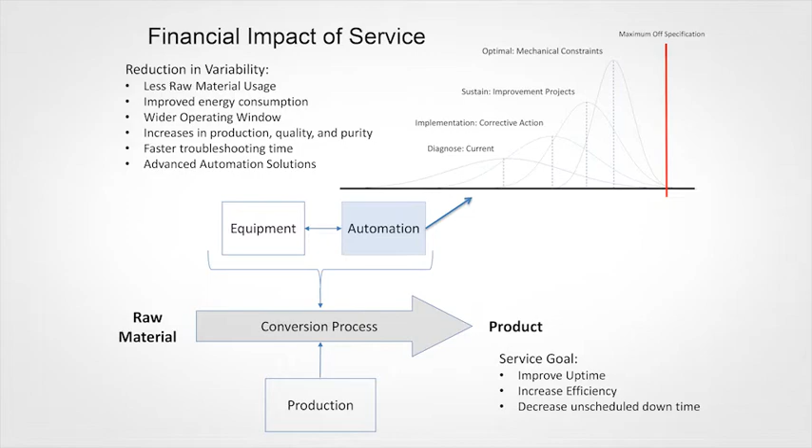That's what we're seeing in this picture. Now we have more data than we've ever had in the past. Without an automation system, when you're controlling it by manual methods, waiting for a reaction before you make a control, you typically have a wide variability in the spread of your quality data or your production data. By adding automation equipment, we're able to reduce the spread of that variability and allow you to have a wider range of control of your industrial process. A wider range of control allows you to run faster, run longer, run smoother, have less wear and tear on the equipment. That's why automation solutions are even put in place to begin with.

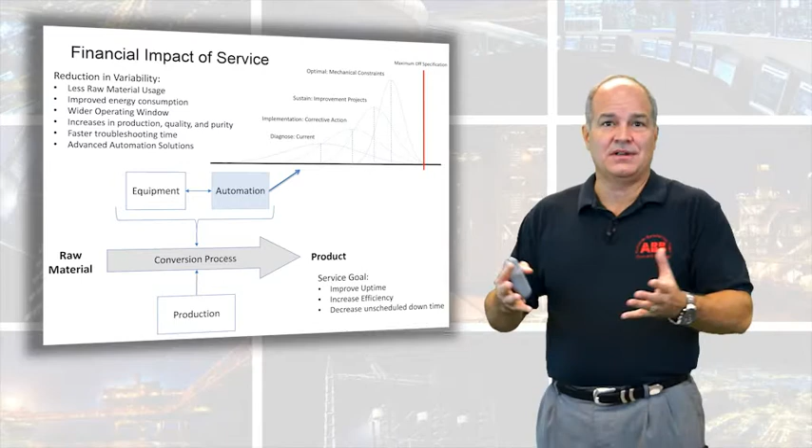Instrumentation, smart instruments, protocols that can tell you everything about them. There's more data coming from an instrument than we've ever had before, and at more accurate and less tolerance and error to the measurement. Then there's the utilization of the control system. We, as a manufacturer of automation equipment, didn't design it to be turned off. If the control is not running, it's broken.

Data storage. 20 years ago, there was no such thing as data storage. It just sort of flowed through. We would get called in, and I'll show you a picture in just a minute of what we mean. But today, we have gigabytes, terabytes of information at our fingertips.

The platform, there used to not be a control system platform, now there is. Software applications that can pull together multiple layers of control strategies, from multi-input multi-output to feedback, feed forward, ratio, min-max. There are so many different applications we can do through software that weren't even possible just a few years ago.

User displays, are they set up for your operators to get the information they need? It's no longer okay just to look out over the plant. They need to be able to look into the plant.

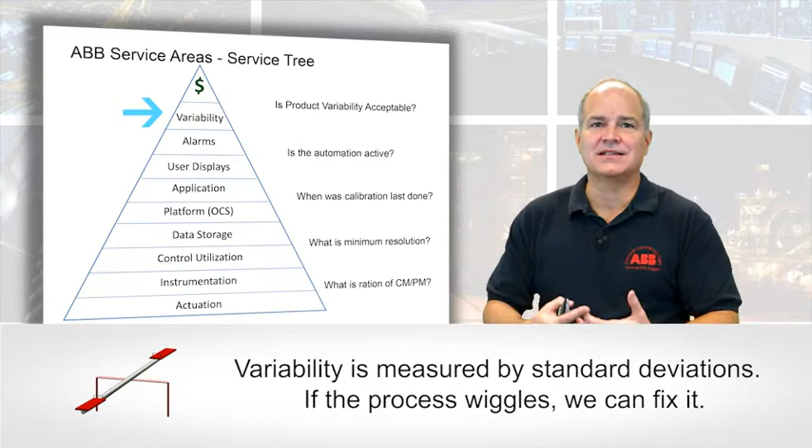Variability, this is the area I tend to migrate towards, is production variability. What's going on in your process? Causality issues, input, output, bottlenecks. How do we fix that?

And the reason we do all this stuff is to get to the top of the pyramid here, which is money. The better your automation system is functioning, the more production, the more quality, the less cost to produce, which is more money in your pocket. That's why we have an automation system.

But with that system requires service. This is an actual picture that I took 20 years ago in an industrial plant. You can see here, this was the definition of an operator display. These are quarter din controllers that would line a whole room.

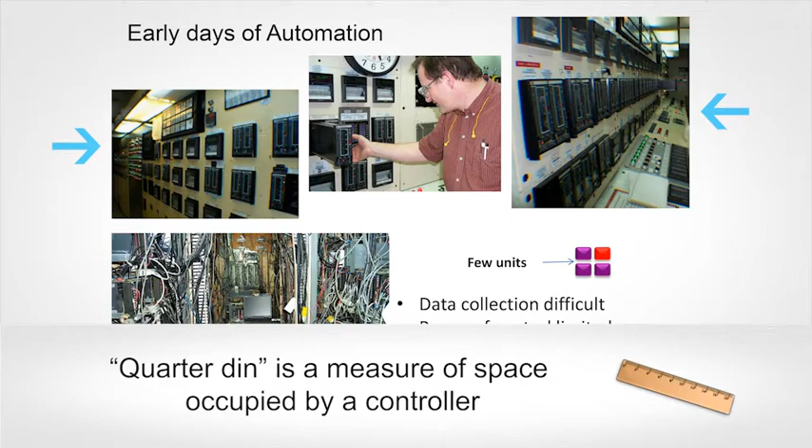You can see them, and to do any work on them, you'd have to actually go in, pull it out, and look at the paper. This was, and still is in a lot of places, what we're talking about as an automation system.

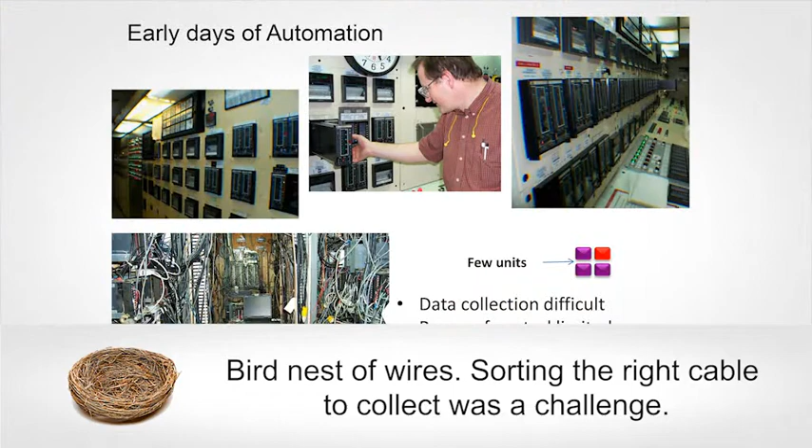Maintenance on this was very, very different. If you went on the back side of this wall, you saw this panel here. This was actually my notebook. I was sitting on a cable, you can see it, reel. There was my computer, my case, and this was the back of these panels.

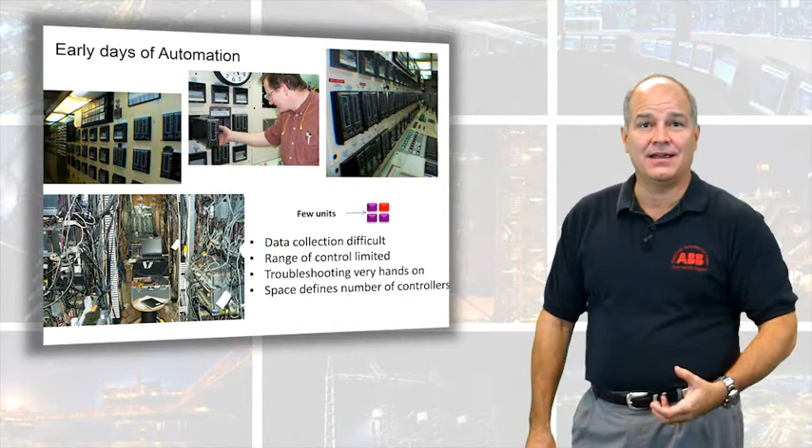At that time, we were only able to look at 3 or 4 controllers at a time. Customers paid a lot of money for us to come in. It was very risky, very dangerous, and you can see it was a spaghetti mess to get data.

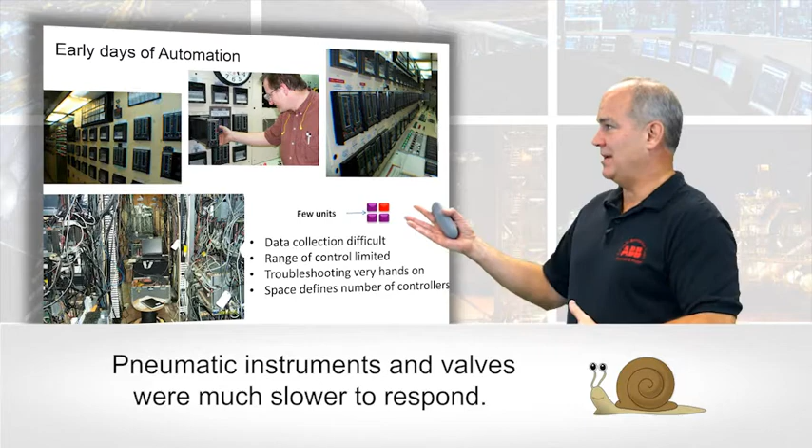The good thing is that when these systems broke, it really wasn't catastrophic. One of these could go down, and that's not true anymore. There weren't so many. So if it took us an hour to find a broken asset, within 4 hours I would find it. That wasn't too bad.

What about today? Fast forward to today's systems. This is what you're looking at. Over here you can see there were physical space constraints based on the size of your wall. Today it's not that way. You have operator displays that give you more visibility than we could have ever dreamed.

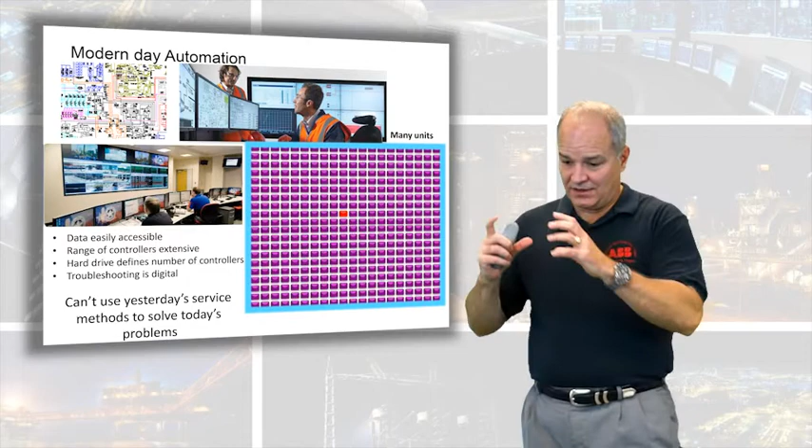You have process charts that have more information than you can even grasp. This represents 400 control or automation systems, which isn't uncommon. I've seen some sites that are up to 2,000, 2,500.

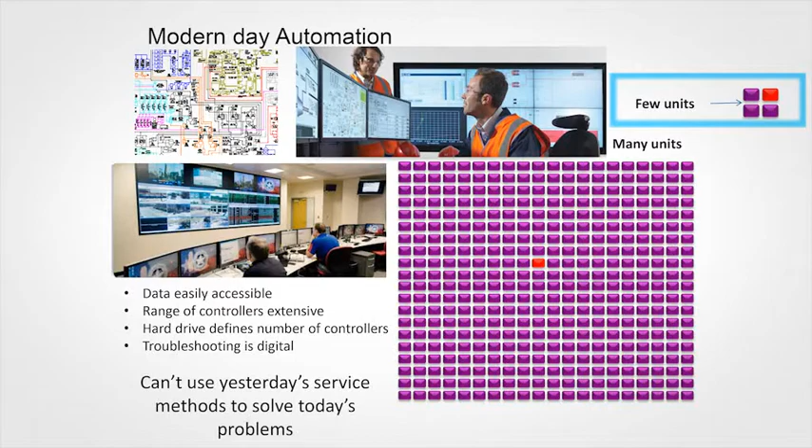Now take a look, if you notice, right in the middle, I've changed the color of it. So that one has the same problem as this one. Using yesterday's techniques, it took me 4 hours to find that problem. How many hours is it going to take to find it here? Literally, it will take so much time that you'll never find it.

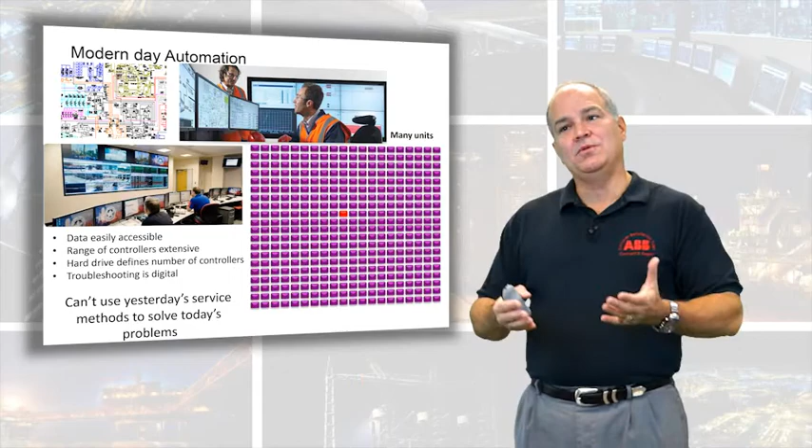So what has happened is we've moved into the area where operators, these guys running the plant, have to tell the E&I staff when it's broken. So what made the operators experts in automation? What's happening is a decline in the ability of our automation system to do what it was designed to do, because we're using yesterday's techniques on today's systems.

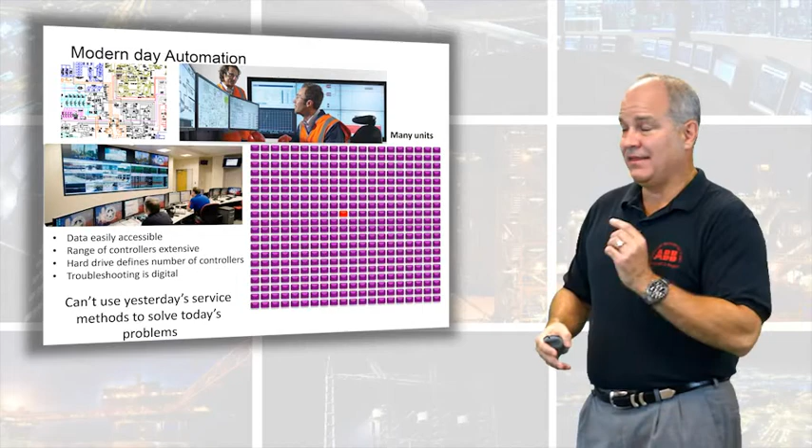That's what automation service enables you to do, is to expand your scope of what you're looking at. You can't add enough people to do the methods we used to have. So it's kind of like that whack-a-mole game, you're solving the problem, whichever one comes up.

It's a very reactive service. Reactive services are dangerous, cost inefficient and ineffective. You have to wait for a failure before you start. That's not the service of automation, and that's not how we designed it to run.

This picture captures the essence of what we're doing with these gigantic automation systems that are put in place for a reason: to make more money for our customers and our clients, and to improve efficiency of taking a raw material and making it a usable material.

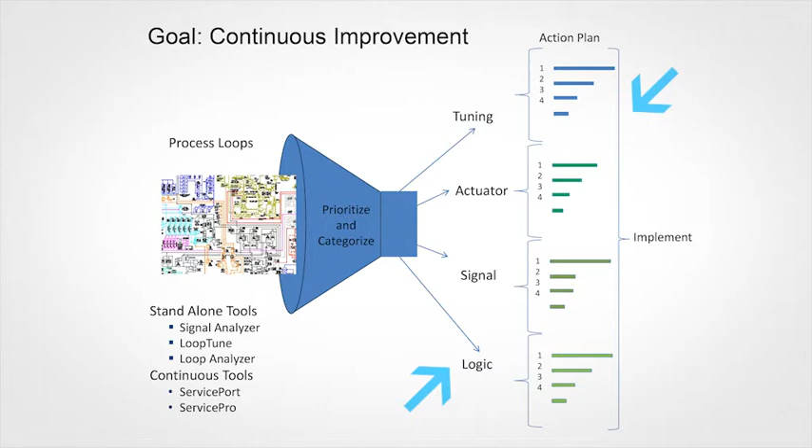But you have these gigantic systems. Wouldn't it be nice if we had a mechanism to sort it in terms of a prioritized list that tells us if I have a control problem, a tuning problem, a cybersecurity problem, or an alarm problem? Or what's the mix of preventive maintenance, corrective maintenance, or predictive maintenance?

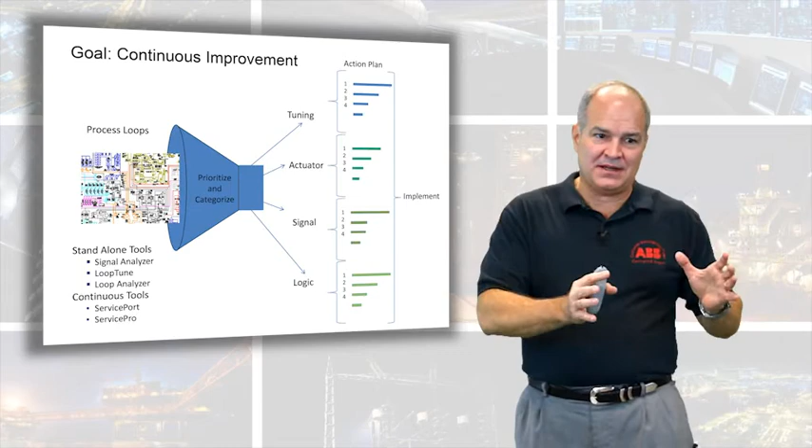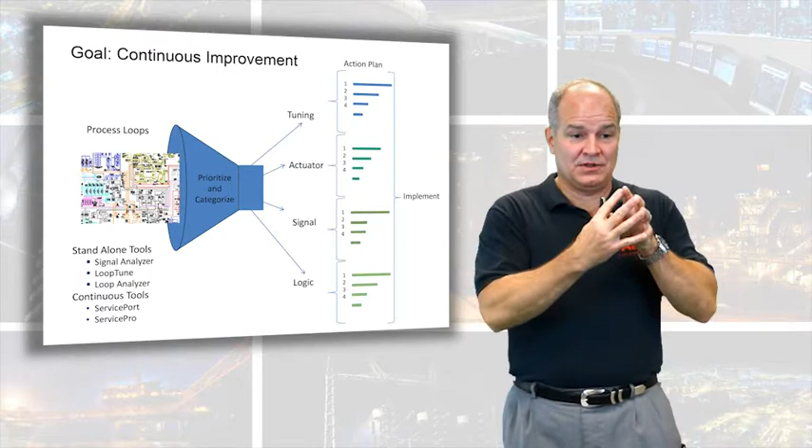Well, what is that mix? That's what automation services is addressing. The equipment and maintenance practices, you still have to have those. You still have to do maintenance on the physical equipment that converts the raw material. I'm talking about the automation system that governs and makes the equipment move. That's the service we're talking about.

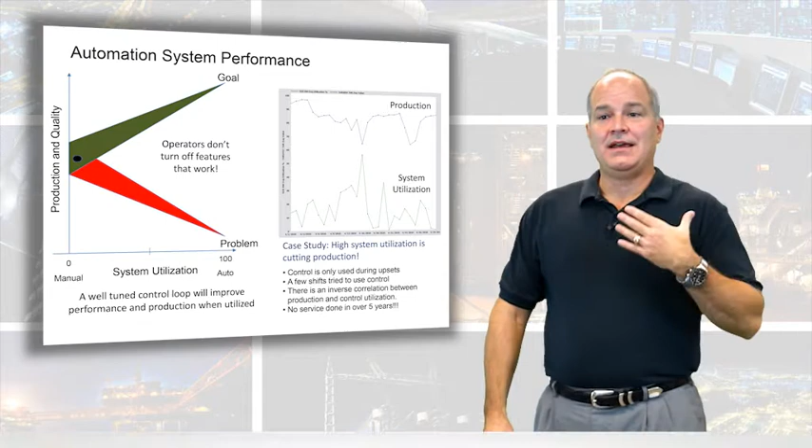Being a provider of automation equipment to the industry and one of the designers and developers of our automation equipment, I can assure you we didn't design our equipment to be turned off. This is an actual case study of a site I got to visit that shows production trends and control utilization—in other words, how often they used the ABB equipment or industrial equipment to improve their production.

You may not be able to see the scale, but this is about an average of 15%. That means the customer only used the equipment 15% of the time. When I asked why they weren't using their system, they said, well, we only use it in case of emergency because it does this—it's causing variability in the process.

You can see where a few poor guys tried to use the industrial equipment. They tried to get up to close to 70 or 80%. Look what happened to production—it dropped. If you're an operator and the button you pushed makes your life worse, how often will you push that button next time? You can see very quickly they quit using it, and production recovered.

So for that customer, he was saying, I can run my plant better than with your automation system, and I will only use your automation system in case of emergency. What he'd worked himself into was a situation where the automation system wasn't configured properly. It hadn't been adjusted, it hadn't been maintained. They had the idea that once I turned it on when I started, it ought to just run.

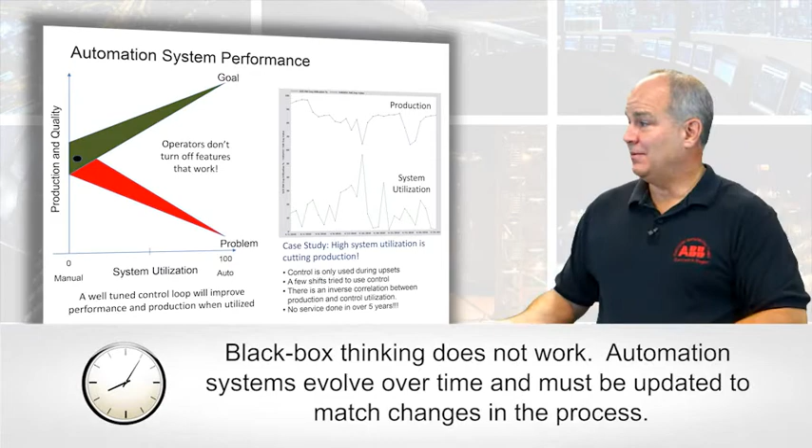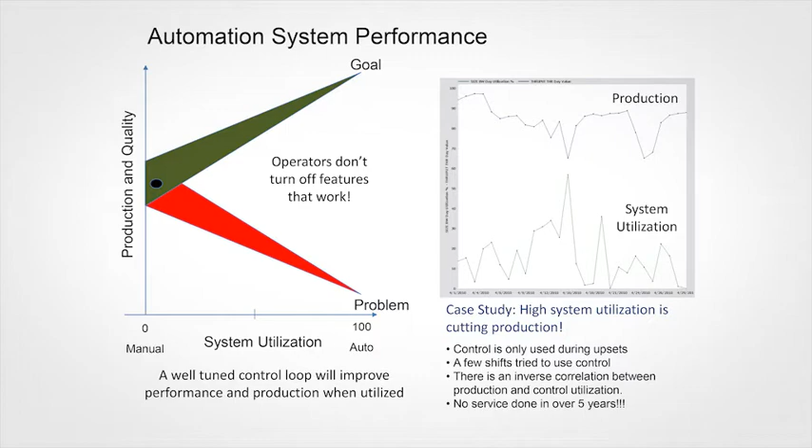Well, what had happened over time—valves change, actuators change, instruments change, settings change. They had worked themselves into a situation where when they turned the system on, they got problems, and when they turned it off, it got better. That is wrong. That's not how we designed it.

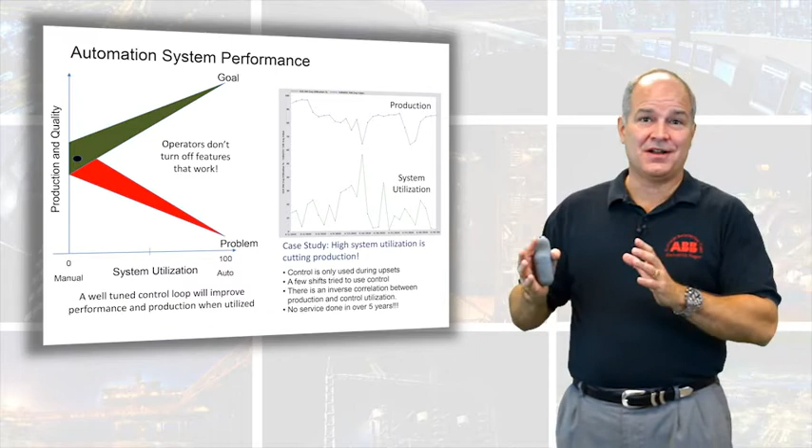If you're in that situation, that's the first clue you don't have a well-distributed automation service solution. We feel, and have data to show—I'll show that here in a minute—that when your automation system is in use, you will not want to turn it off. If it's off, it's broken. Operators don't turn off features and functions that make their life easier. That's sort of the golden rule of automation service.

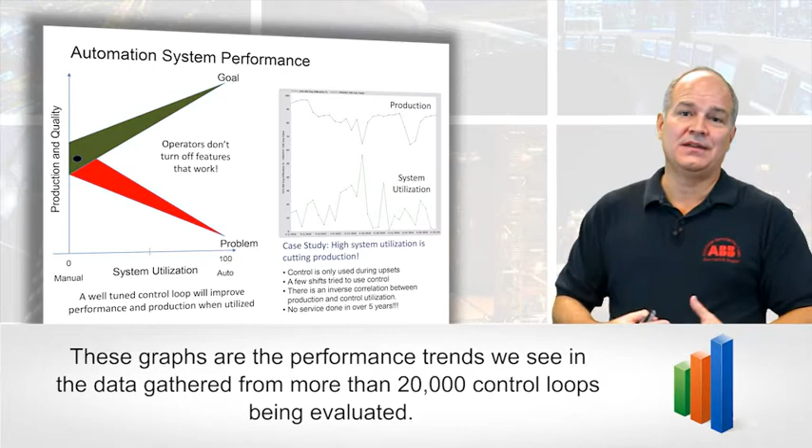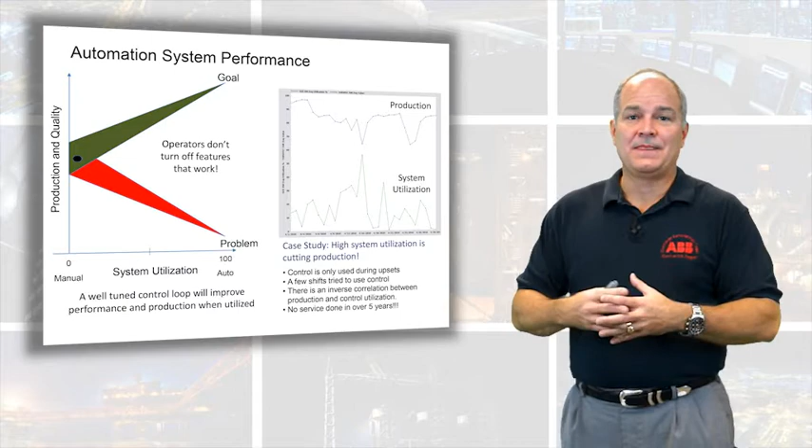This picture was kind of sad for me, and it illustrated trends we're seeing, not just in our equipment, but across the service sector. I get to work on all the big service automation solutions and systems out there, and this is sort of an epidemic. This picture further illustrates that. We're currently monitoring over 20,000—probably closer to 30,000—control loops every 8 hours around the globe, and what we're seeing is literally a measurable degradation of performance.

This is what we call the half-life of a control system if you don't maintain it. If you have it perfectly installed at startup, you've got a system you love, it's working great, 100%, your product's up, you're making money, and then you walk away and say, I'm not going to touch that thing anymore—what's going to happen? You would hope people have this idea that the system will stay flat, that performance will either stay the same or get better.

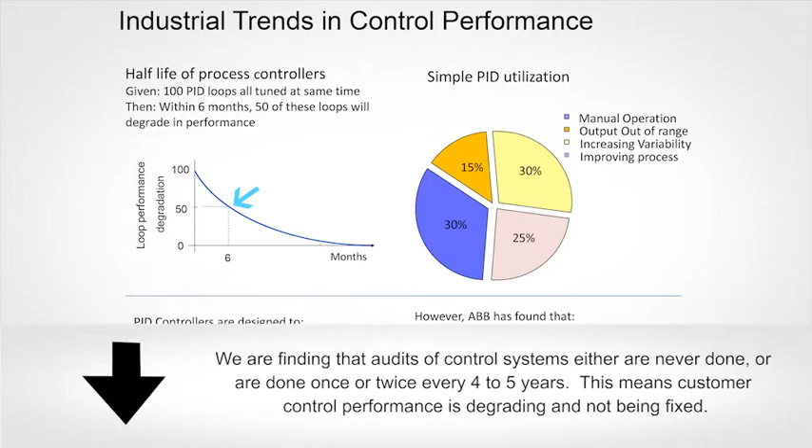If you don't maintain it, we've found you have basically a half-life of around 6 months. Maybe it's a year, but in 6 months to a year, if you don't do anything to your automation system, the performance you got at startup is going to reduce by about 50%. So my question to you is, when was the last time you did a survey of your automation system? If it hasn't been 6 months, you have a system that's not operating at peak performance.

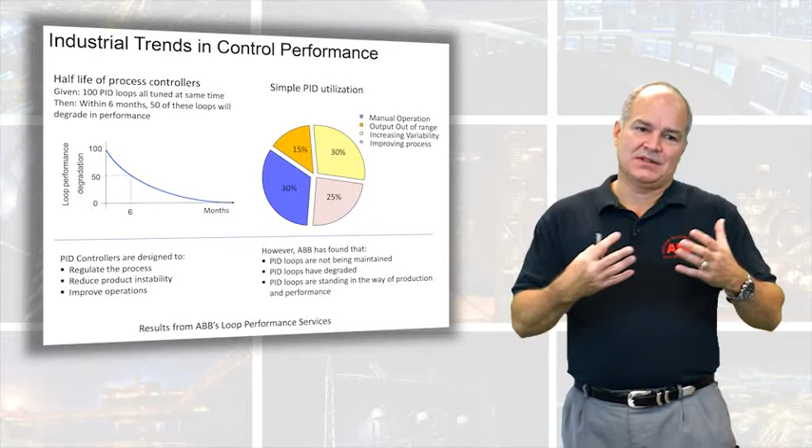Which isn't really uncommon, because as a system is installed and the customer gets to learn how to use it, they put their foot on the accelerator and start to speed up. As you speed up, actuators have to get out of the way and they hit a limit. When an actuator is at a limit, you have no control. So almost half of the controls in your plant aren't doing anything. The very reason you bought your system, half of them are turned off.

30% of them are actually doing the opposite of what you designed them to do. Remember the customer that said it was waving at them? That's what we're seeing. 30% of the time, the oscillations are coming because the control parameters, the actuator, or the I2Ps are broken or haven't been maintained. I've seen valve positioners that are full of all kinds of garbage because they got rust in the air and now they're sticking. There's things that cause variability.

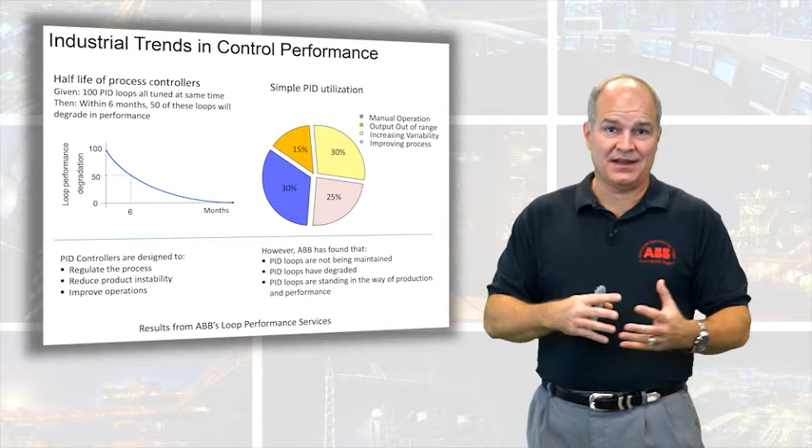The reason we got here is we're using yesterday's techniques on today's automation systems. We need a system, we need a solution, we need tools, we need to supersize our ability. We have to take what used to take an hour and take it down to 10 minutes. We have to take what used to take 8 hours and take it down to an hour. You can't do that with the techniques we used from yesterday. You need a system, you need a solution, and that's what Automation Service Solutions is.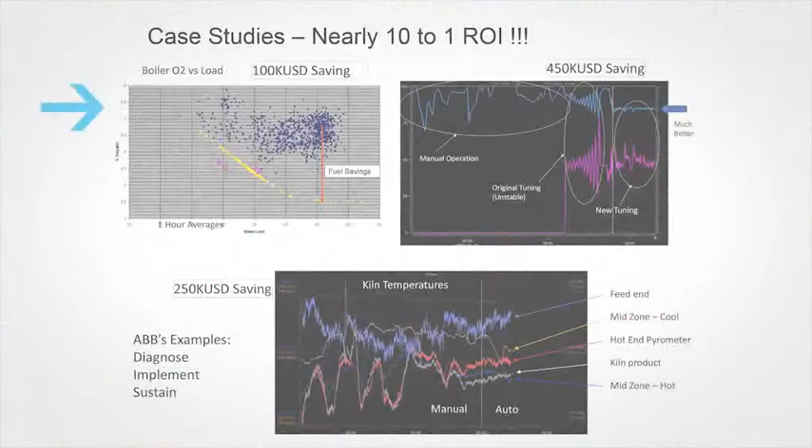These are some other really neat examples that show from a production perspective the financial impact of a well-balanced automation service solution. This top left was an industrial boiler, and you can see that we were able to save them over $100,000 a year simply by fixing bad actuators, dampers, retuning the controllers, changing the function modules to get the air and gas flows right.

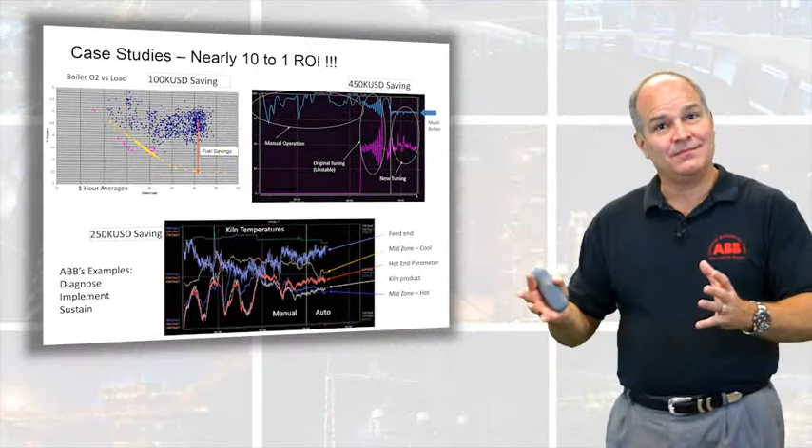This shows before, which was the scatter plot. This shows after we fixed it. This is you're no longer heating up air and sending it up the stack. You're putting it in the water and getting more benefit from it. These pink dots are when the operators forgot to put it in auto. So now the customer said, we're going to pay you to make sure that our system stays on. That's music to our ears, because that's what it's supposed to do.

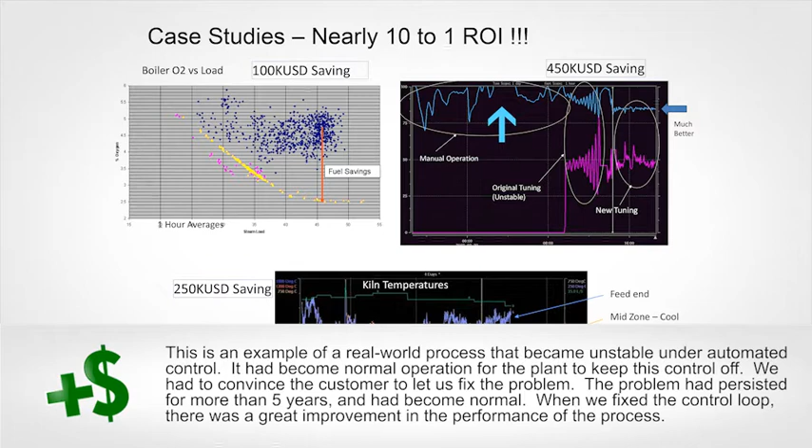This is one of my favorite pictures. It was around $450,000 in savings to a customer. What you can see here is before, this was they ran the control in manual. And the variability, this was a large vessel that fed the front end of an industrial converting process, and it was highly volatile. And when we turned the control on, it not only waved, each wave got bigger. That's called unstable. This is the definition of bad. When they turned it on, things were going to go boom shortly.

So we flipped it off and we went and did inspections of the actuators, the instruments. We did bump tests, step tests, first principles, and we came up with logic changes, algorithms, adjustments to the instruments, and look what happened. We went from this to this, and it was sustainable, and it lasted. That particular change calmed down the entire machine, and the customer came back and said, you saved us over nearly $500,000 a year.

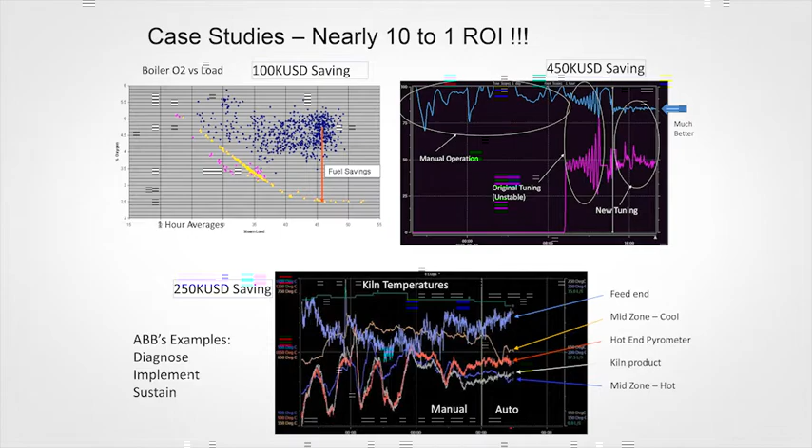This was a huge multivariable solution where this was normal. The customer had come to say that this variability is normal. And we're like, that is not normal, that is actually not good. And they argued with us that we couldn't fix it. We're like, well, just let us try. So we went in and provided a well-balanced automation solution, and look what we did. Boom. And it was over $250,000.

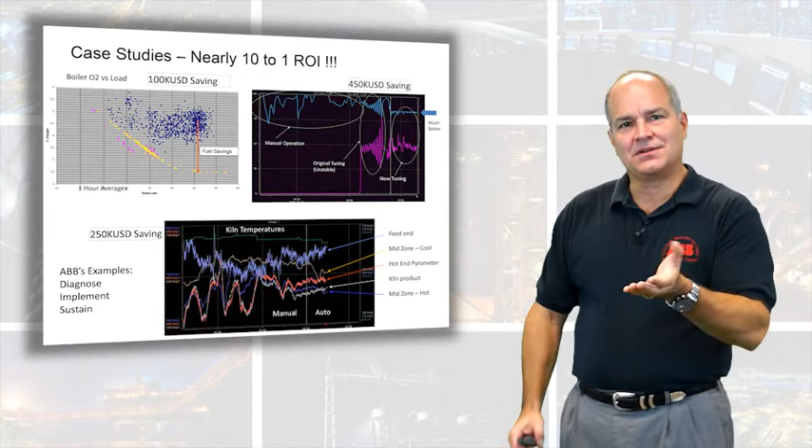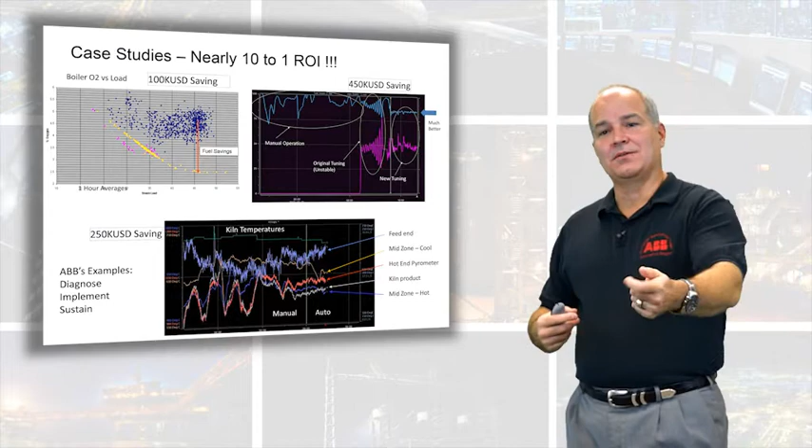These three examples, and I've got countless others, is where production people come to us and say the cost of this service is peanuts compared to the return. Why aren't more people doing it? And I think it's because we just didn't know we needed it. Now ABB is offering a solution to our customers that allows these kind of returns to happen all the time. In fact, we're seeing that if you give us $1, we'll find $10 in savings almost every time.

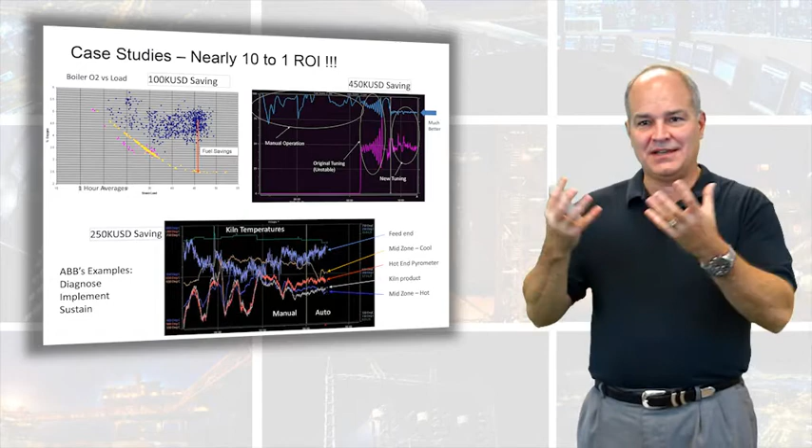If you went to a bank and said, I'm going to give you $1 and he'll give you 10, how many dollars would you give him? That's what we're able to do with service - untap potential, things that had become normal operating procedures, workarounds by our operators. We can identify that through automation service solutions. A well-balanced solution has to have these four categories addressed.

You have to be able to look at the hardware, valves, transmitters, controllers, displays, and you have to have a maintenance management system to do that. You have to look at the platform itself. That's something that's new. The computer, look in your house. How much automation do you have in your home?

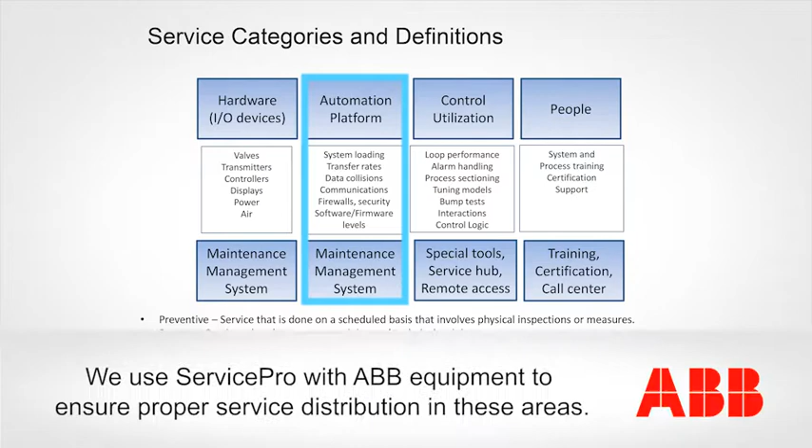We have to look at things like loading, data transfer rates, collisions, communications, update speeds, software revisions, antivirus. That's a whole class in and of itself. Control utilization, which is what I tend to gravitate towards. But if the control utilization is off, is it because the hardware's broke, the controls broke?

We have to be able to look at control loop performance. How about alarm handling? How about process sectioning, tuning, bump tests, interactions, causality, interactions - that's a whole field in and of itself. We call that advanced services.

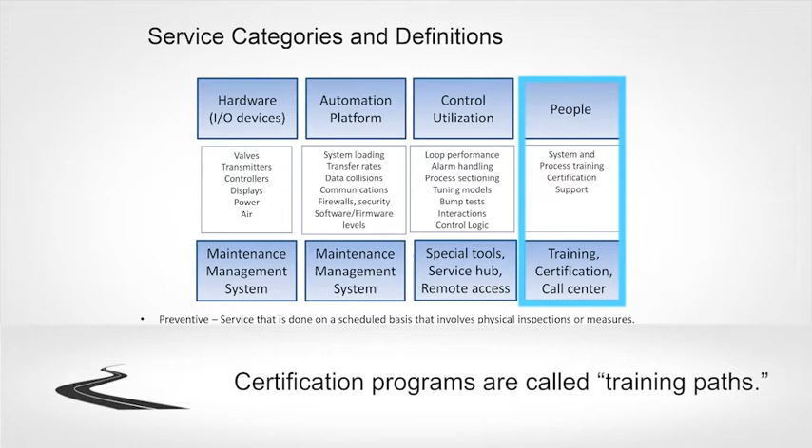And then your people. When was the last time you trained them? Are they certified to work on this new equipment? Are they still using yesterday's techniques on today's systems? They're not efficient, which is costing you money.

If you have a downtime and it takes 5 hours to fix, and you have 5 of those trips a year, that's 25 hours, or a month, that's 25 hours of downtime. If you had a person that was trained with the proper equipment, those trips could go from 5 hours to 1 hour. You just gained 20 hours of increased production.

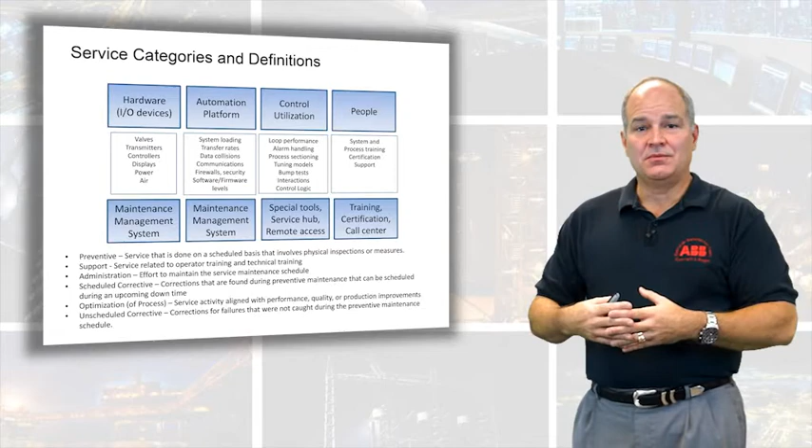That's what we're talking about - we need a service platform that can deal with all these areas. In ABB, we provide a service solution called ServicePro, where we provide training and methods to help you reach your performance goals. There are several systems out there, but ServicePro is the one that we provide to address this.

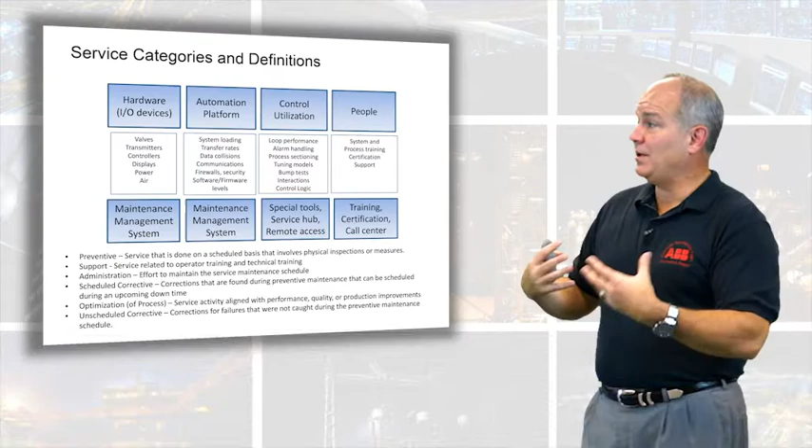And we break service into these categories. There's preventive service, preventive maintenance. That's regular checks, like your oil change on your car. There's some checks you just have to do.

Support is typically where we're working with your operators - phone support, technical support. Then we can get into administration, where we have a service agreement with you, and we want to reduce the cost of that agreement so that you can maximize your dollars for improving your automation system.

So we measure that. We look at scheduled corrective - those are things that during our rounds, or maybe even a preventive, predictive service found, and then we schedule those and fix them at times that aren't going to affect machine runtime. Those are scheduled corrective. This optimization or process services is the one that talks about advanced services.

It's dealing with the process, the information that's flowing through your industrial plant. And then we get into unscheduled corrective maintenance. Those are the bad ones. Those are where, and they're going to happen.

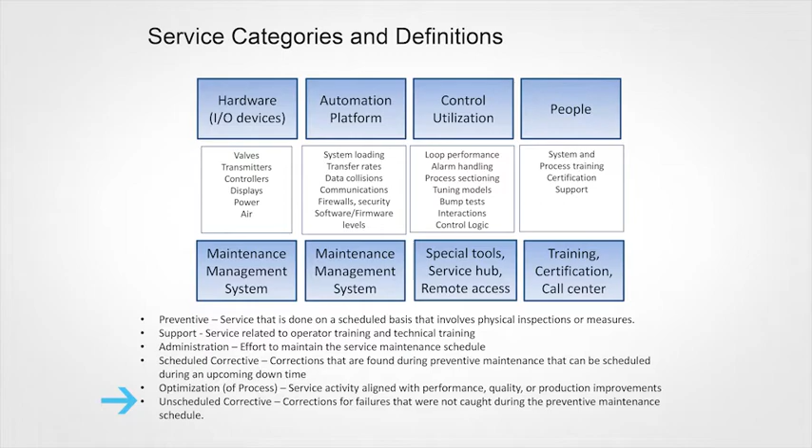No matter how great this is, you're going to have a problem. So are you set up to resolve that problem quickly? Are you able to get back online quick? Unscheduled corrective is where you have a failure that we didn't know about.

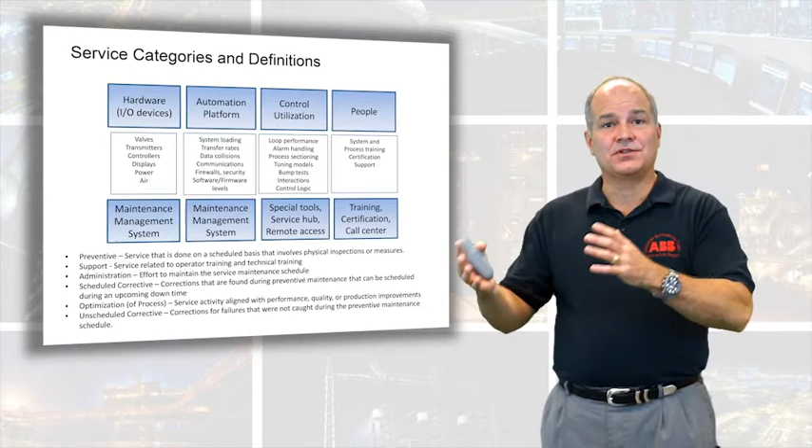If you're tracking all this information through some sort of a maintenance management system, broken into these things, we've been able to identify ratios that are proper in how much your hours should be distributed amongst these service categories. And that's what I'm going to show you next.

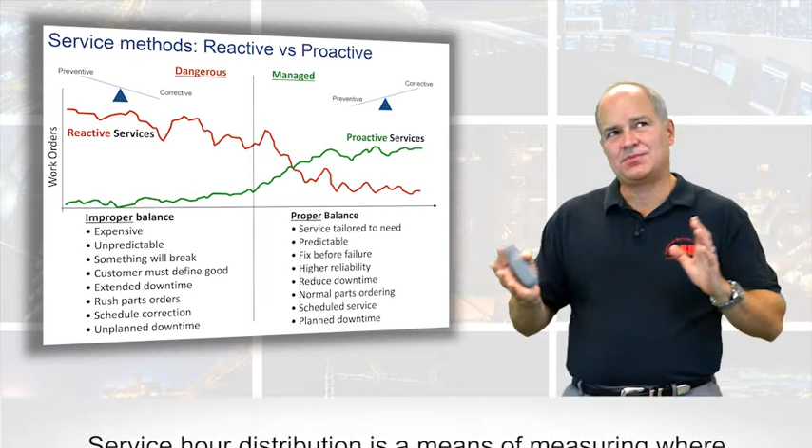What we're finding is, what I was just alluding to, it really comes down to almost a philosophy of service. If you run to failure, then you know it's broken, but you never know when that failure is going to be. And so what happens is your reactive services - you're reacting to a problem.

And our plants and industrial sites are getting so big, it's hard to fix all of them. So you only fix the most serious ones, and then the other ones just kind of go unattended. So what happens is our reactive service is expensive because you have downtime. Unscheduled downtime has a direct impact on overall equipment effectiveness.

You don't want to do that. You want to try to catch the problem, map it into a scheduled downtime. And typically preventive maintenance just isn't really done. When we put in a service program, we can migrate the service effort so that we can increase our preventive and proactive services. And by doing that, we can drive down the expensive, unscheduled corrections.

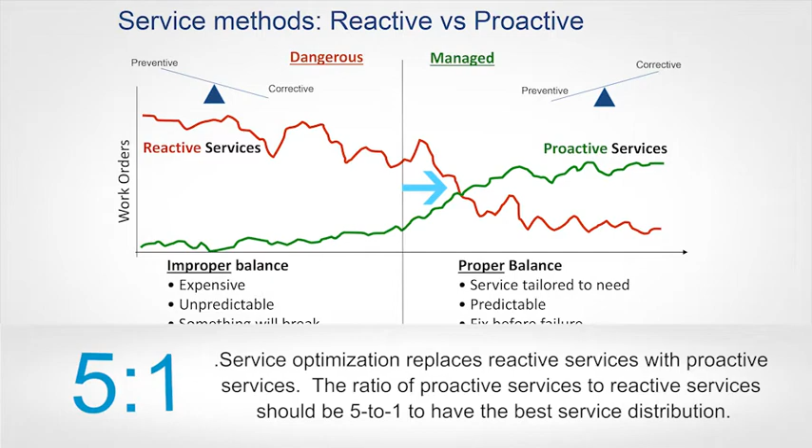So that's called a proactive service. Proactive services, how do we get there? What do I mean by a well-balanced service distribution?

That's this picture. I recently was called into a corporate site that had facilities on actually both sides of the world, but they made a product mix that overlapped. So inside where they overlapped, they made the same product. In one part of the world, they made the same product, they had the same equipment, the same automation, even the same raw materials. But on the other side of the world, that had the same equipment, same automation, they couldn't make the product.

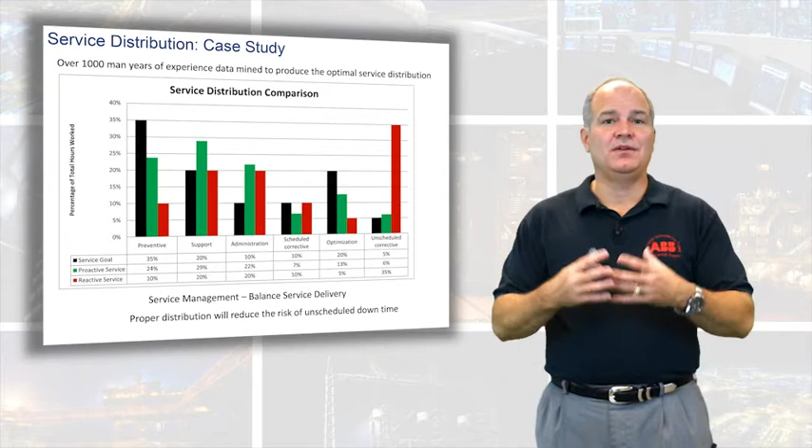It was getting heated because the facility was getting ready to be closed because they couldn't make this product, and we got called in to evaluate what's the difference. On paper, they looked identical. So we started doing research and identifying the service distribution.

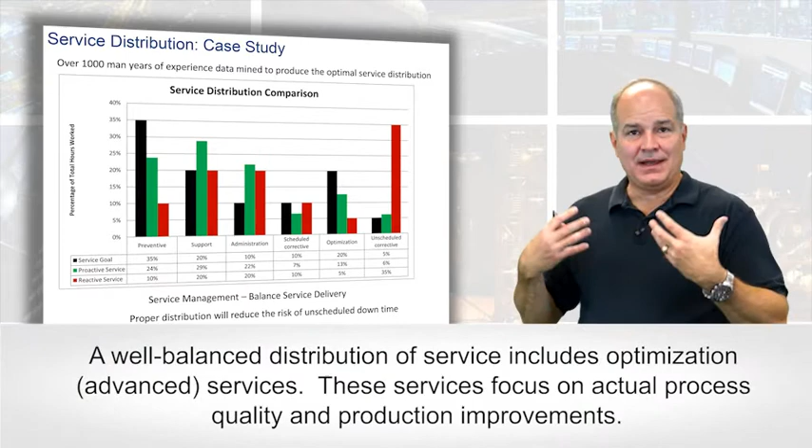What we've got here are these black bars, which is what we found. We've now got over 1,000 years of service activity recorded, tracked in the categories I talked about earlier. This has found that customers making good product, with good quality and a good relationship with us, manage their service according to this distribution. They've got a lot of preventive maintenance, the right preventive maintenance, and support for their operators, phone support and technical support.

We have minimized the cost of service through our administration. We have handled scheduled corrective maintenance so we can find things and fix things. And we've added advanced services, which is the process component. As you get further into understanding and stability of your equipment and application, now it's about making all that stuff work together.

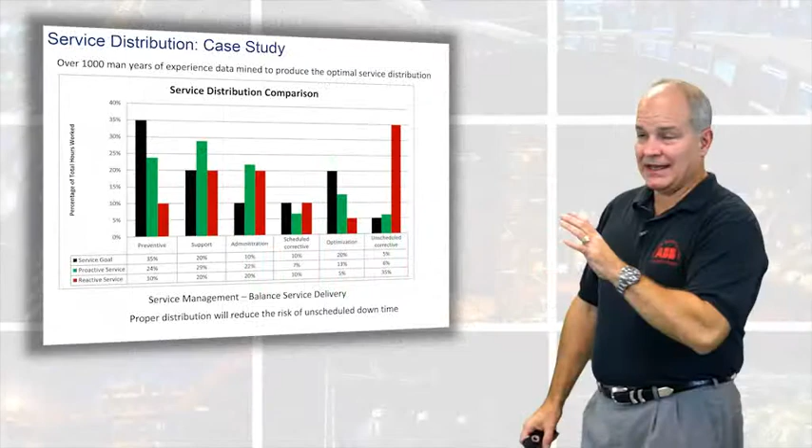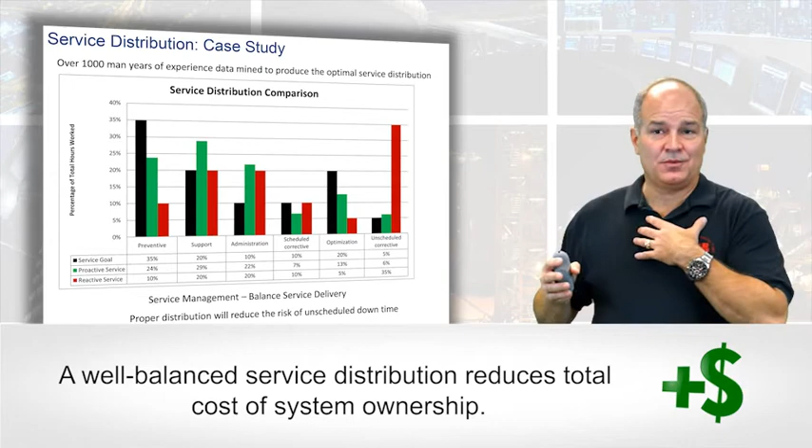And this is unscheduled maintenance. Notice we balance the service distribution to drive down unscheduled corrective maintenance. That's our goal. That's what we found over 1,000 years of service measured and sorted, and we said this is the goal. Whether you do it, we do it, or somebody else does it, this is the service strategy you have to have — you have to have this distribution.

This increases the life cycle of your system, which is great, and it reduces the cost to produce, increasing production and quality. Look at the difference. The green side is the customer that was making the product, happy and able to sell it. The red side was the customer that couldn't make the product, was unhappy, and the plant was about to close. Can you tell right off the bat what the problem is?

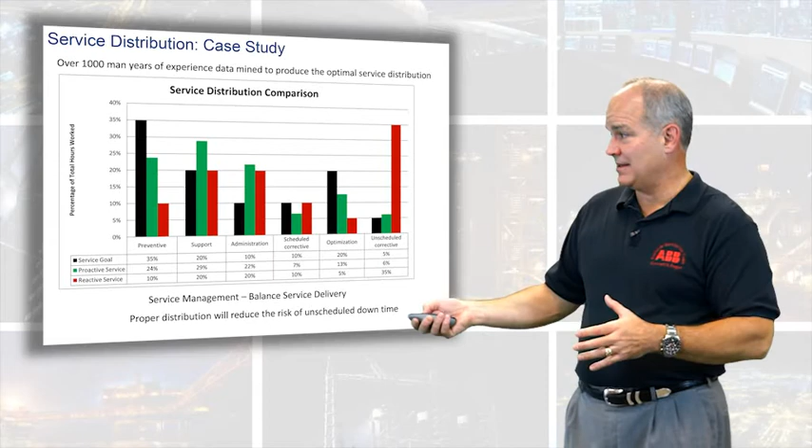Look at this — unscheduled corrective maintenance was their philosophy. They would run to failure and then try to fix it. There was no proactive service. It was interesting, the stuff in the middle was very similar, but the proactive versus reactive approach is what tipped the scales.

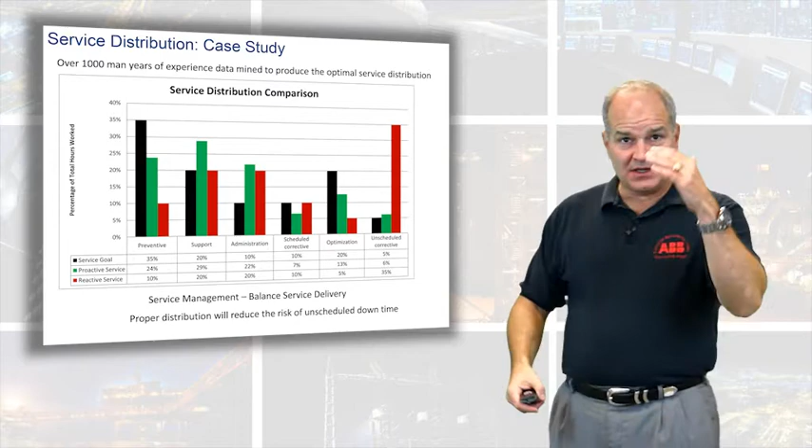When we introduced this and showed it to them, then set up a corrective plan to drive down the unscheduled corrections, they were able to keep the plant running and things calmed down. So we have case after case where we can show that a managed service solution just makes things better.

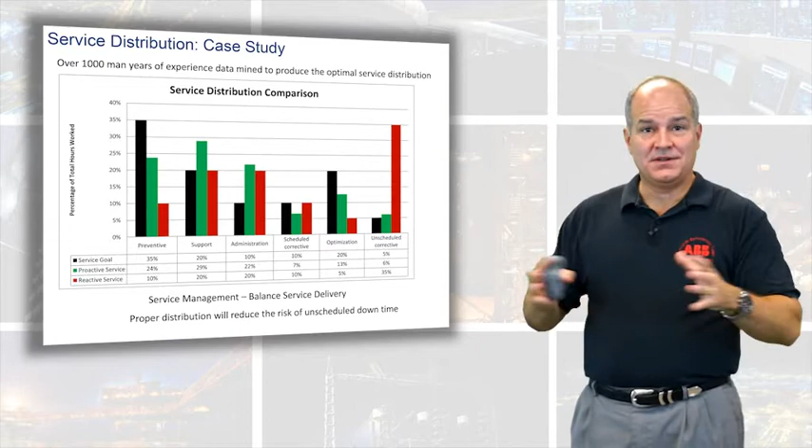In addition, what we're finding is the question of whether your people are skilled to work on that equipment. The goal — we now have certification plans and can measure the skills and training of your staff. I did that at both sites. The site that was proactive was very close to the goal for that particular service engineer, and whether it was their guys or our guys, they made a conscious effort to invest in the skills along the certification plan.

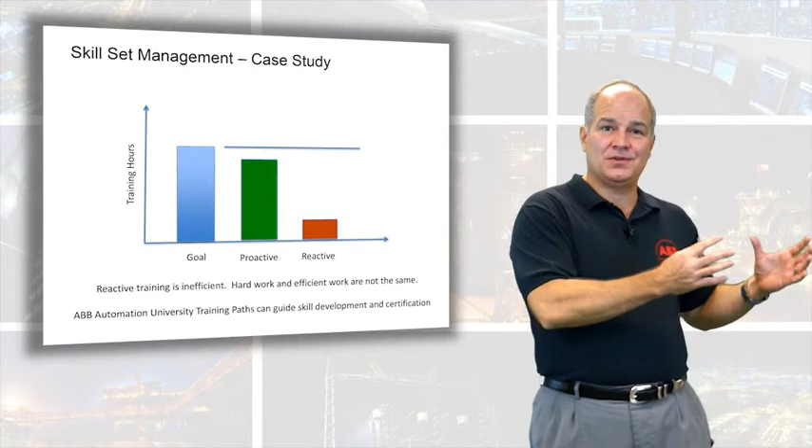The reactive site had the idea: when it's broken, we know what to fix, I don't need to do maintenance. So there was no training, and you can see there was a huge gap in skills. Really, they were using 20-year-old technology to fix today's equipment, which resulted in failures — failures which made it difficult to run, difficult to operate. It was costing them more to make it than the money they could make from the end product.

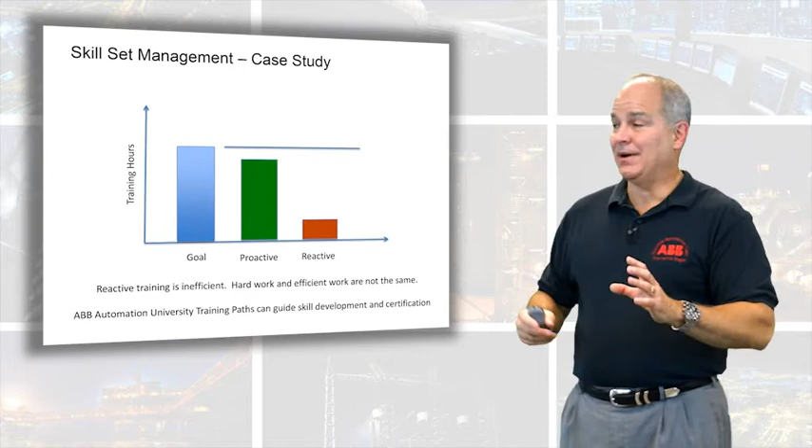It was the same equipment, the same automation system, and the difference was a philosophy on service, period. By introducing a proactive, well-distributed service, we were able to turn that place around to where they're now making money and they're still in business.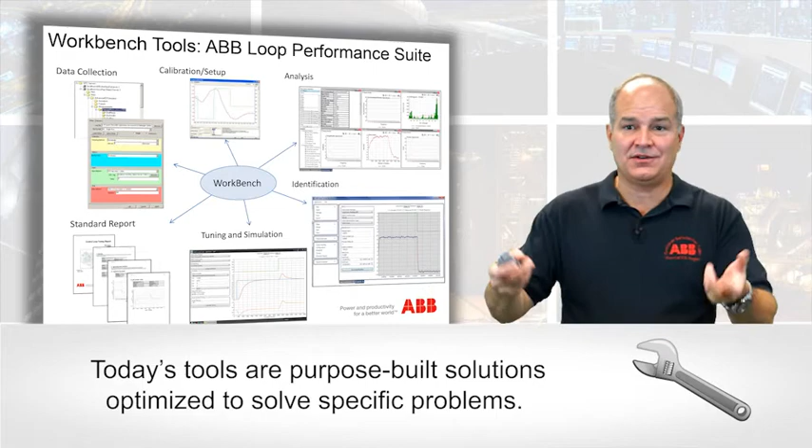In addition to that, we're talking about tools. Every engineer has a workbench full of tools — screwdrivers, Phillips, flatheads, hammers — and we typically gravitate towards the one to solve the problem. In this automation world, the tools are different. They're no longer Excel and PowerPoint, or MATLAB and Simulink. Although those are nice applications, we need purpose-built solutions that allow us to data mine much, much faster.

So this is an example of a portfolio of tools you need to have at your facility. We call them workbench tools, and this is in the area of loop performance. What are you doing for data collection? In the old days it was hard to get data out of a system. Today, with OPC, you can get more data than you know what to do with.

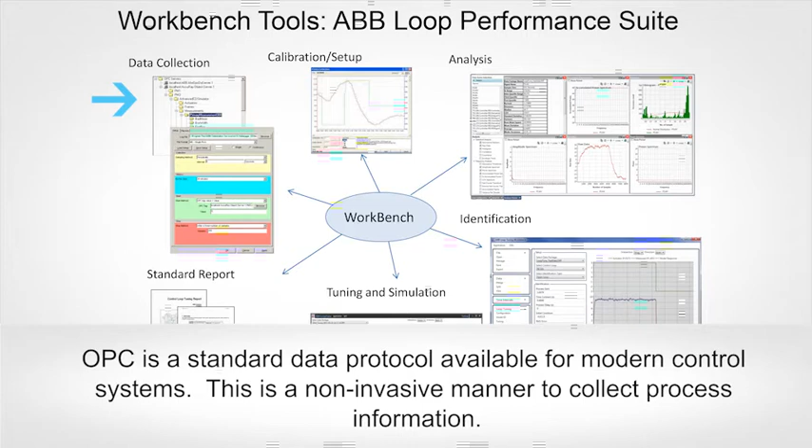How do we collect data without harming the system? What about calibration and setup of your controllers and applications? What do you have to quickly look at your fleet of 1,200 I/O points? Analysis — power spectrums, histograms, autocorrelation.

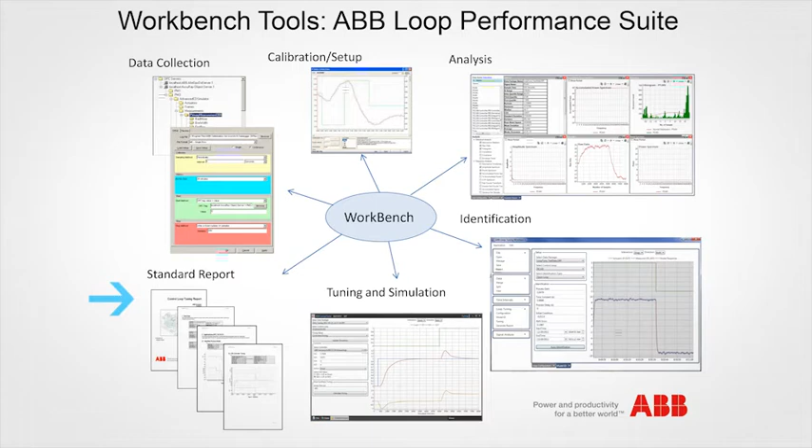What are you doing in that space? What tools do you have to quickly tell you where you have problems, causality, interactions, cross correlations? What are you doing in the area of identification of process parameters, process models? How do you figure out the interrelationships? Because that's crucial for setting up your tuning. How are you doing your tuning and your simulation and making sure that you have a process to address automation needs? And then reporting. What kind of reporting do you do? What kind of reports do you have to represent when you did a control problem or an alarm issue or cybersecurity or actuators, drives, instruments?

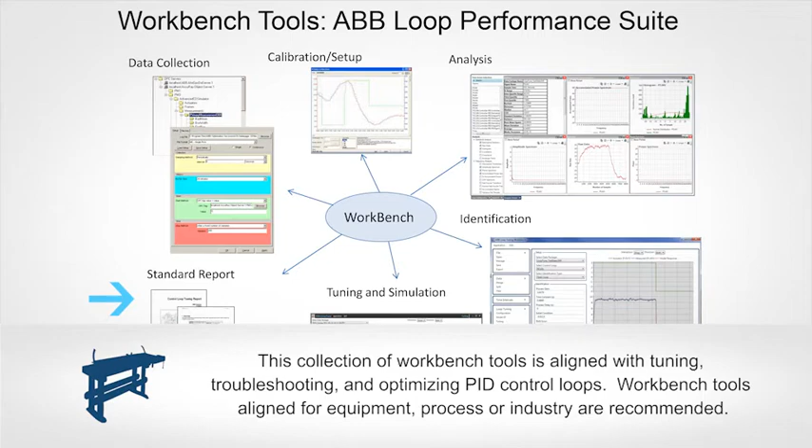There's a portfolio of tools that are aligned to assets that we have to offer. We call those workbench tools. We also recommend that we have a service portal. We call that ABB ServicePort.

ServicePort is a safe, secure warehouse of information that allows you to safely connect to your control network, whether you come in from outside through a remote expert or go locally. We recommend having a service portal. It's safer - if this goes down, it doesn't affect your running network. That's important. In the old days, if a controller went down, it really wasn't that big a deal. Today, if a controller goes down, things can go bad very fast. So we recommend as a safeguard having a service portal that you do your work through.

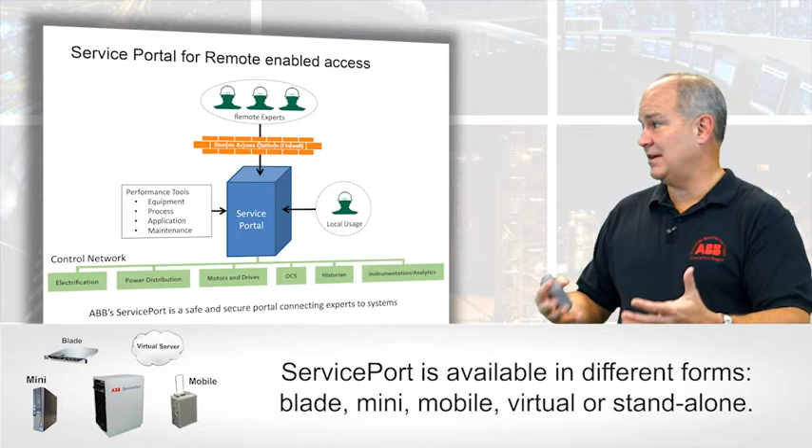This way you have a purpose-built solution that can look at the different assets and provide you information with key performance indicators designed for control loops, security, actuators, transmitters, or efficiencies. We have a whole list of solutions that can monitor your equipment, your process, or your application. But what this allows us to do is get you faster response to troubleshooting.

How can I get to the customer faster? In the old days, I'd have to get on a plane and go, so you were looking at downtime for one or two weeks if I wasn't tied up somewhere else. Literally today, with a phone call and a secure connection we call remote access platform, you can get anywhere and solve a problem in minutes that would have taken weeks.

How much is that worth to you? It can be a lot of money, and it's kind of scary in today's world with the threat of cyber and all that, but a person with a thumb drive plugging in at site can even be more dangerous than a person remoting in from the other side of the world. So cybersecurity issues are crucial, and that's just now coming to light, and we have a whole service suite just around that. But we recommend a service portal - we call it ABB ServicePort.

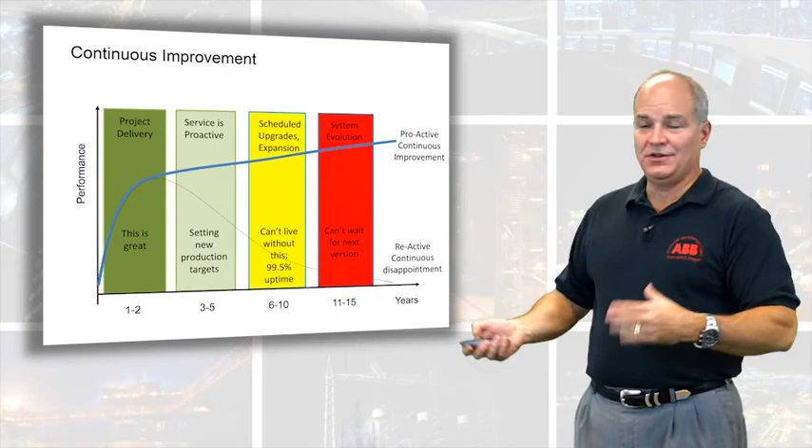When you put all this together, what we like to say is when you install a system, a new project, there's a lot of activity and the performance usually goes up. Now, if you walk away, this dotted line represents the trajectory of system performance. What happens is it's still better than if it was off, but eventually: ooh, why did we get this thing? And boy, I can't wait till it's out of here within 10 to 15 years. That's what we want to avoid.

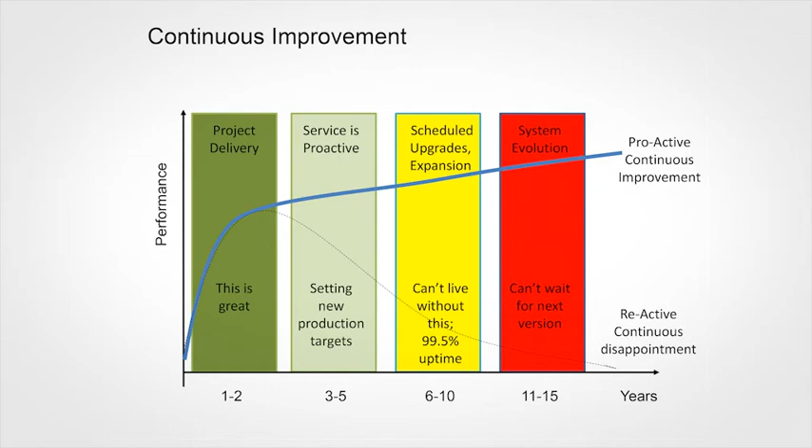If you don't do automation service, your system is going to be a boat anchor within 10 to 15 years and you can't wait to get rid of it. With automation services that are well distributed and well balanced, you can go the other way where you continually get better - you go from 'hey, this system's great, I like it' to 'boy, I want more of it, let's upgrade it and keep it going.' That's what automation service can do.

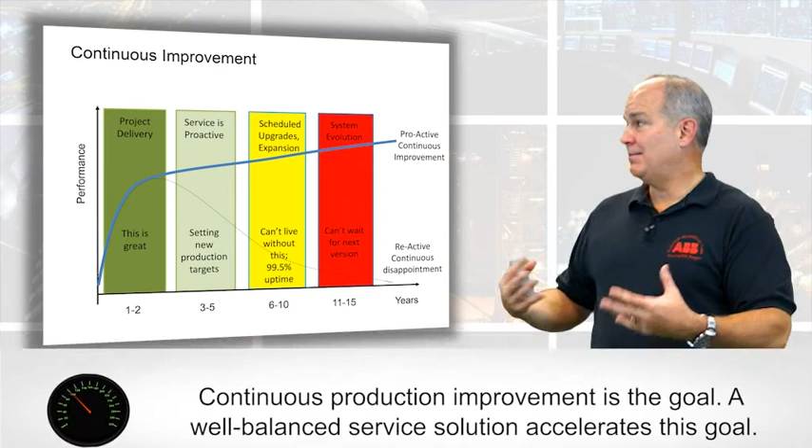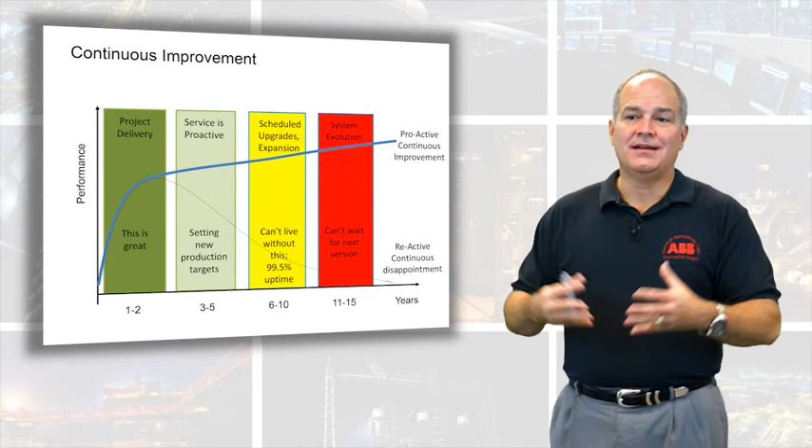When I talk about increasing the life cycle so you don't have to worry, what evolution planning do you have in place? Parts management - how do you get the right parts? How do you know if you have the right parts? How about your balance of workforce? How are your hours being distributed? What workbench tools do you have? How do you get to your site? These are all things that make up a well-balanced service portfolio.